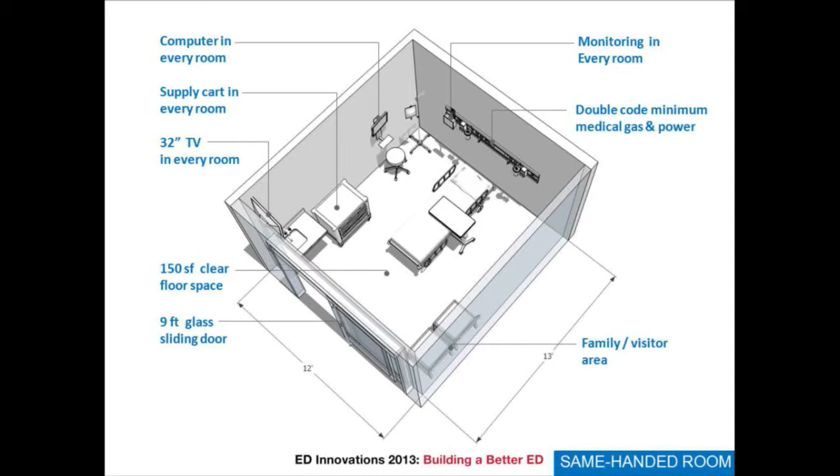Every room has a sink, a 32-inch flat screen TV, a supply cart per room, the document station in every one of the rooms, and then a family area.

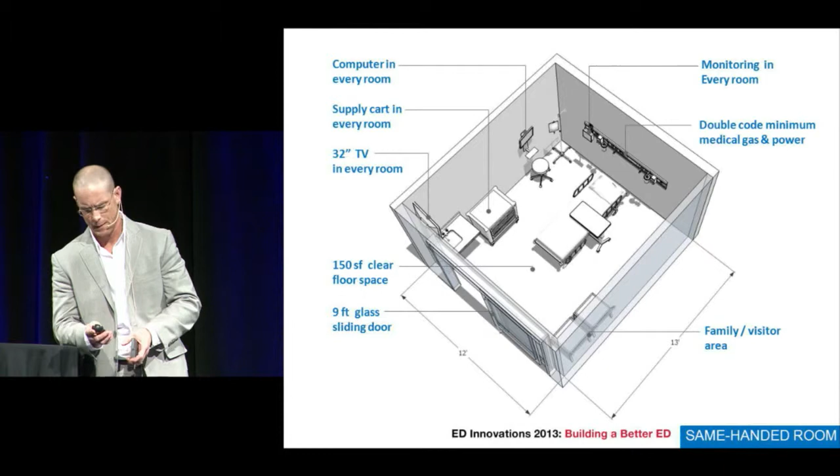We take that same concept of standardization along the room and incorporate it into a pod that is standardized. Each one of these pods is made up, in this particular case, of 12 rooms - the initial intent was a 12-room pod. They're arranged identically, with support space at each one of the corners.

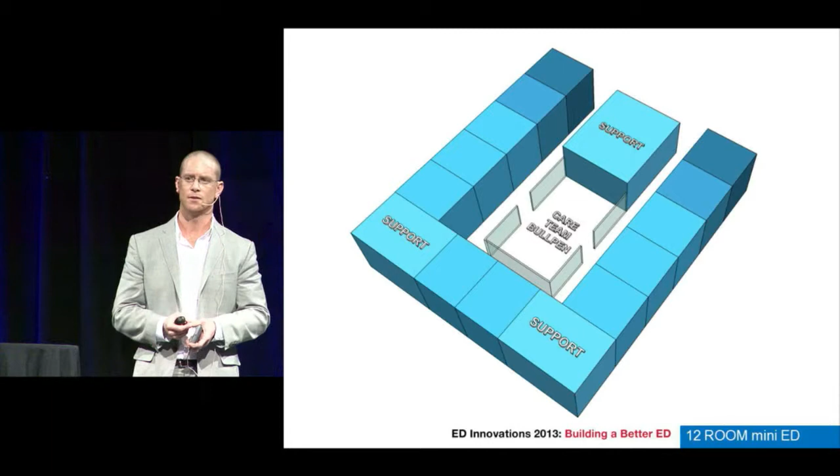So your clean linen, soiled utility, nourishment - all of those areas are decentralized within each individual pod. The pod itself then becomes a self-sustained mini emergency department. And then the number of pods is relative to the volume and acuity that the facility sees.

The core of the pod is what we call our bullpen, which Sherry alluded to earlier - this is our team care area. In this particular configuration, we assumed we would have a patient care team made up of 1 doctor, 3 nurses, a tech, and a unit secretary.

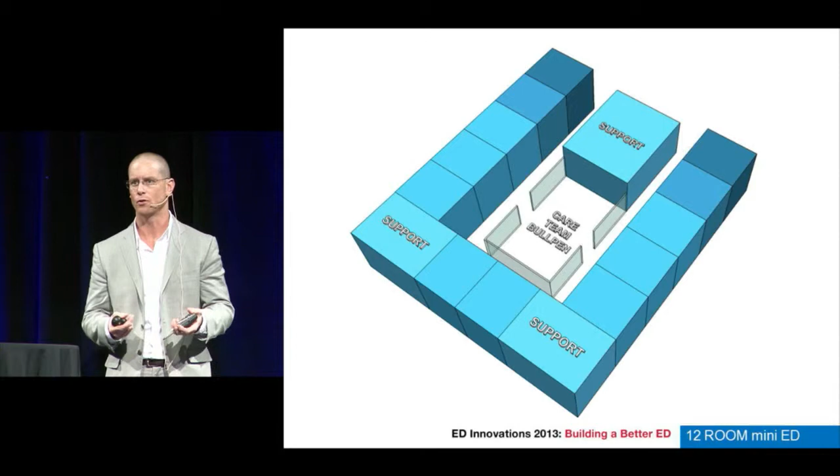The ability to flex in and out with mid-levels is there as well, because the number of rooms is based on the physician and mid-level component and what they can treat and see.

When you take those individual pods, we arrange them along a central spine. So the pods themselves are flipped about a central corridor, which in turn turns them into racetracks. When you talk about a breathing emergency department, this is one of the physical manifestations of that.

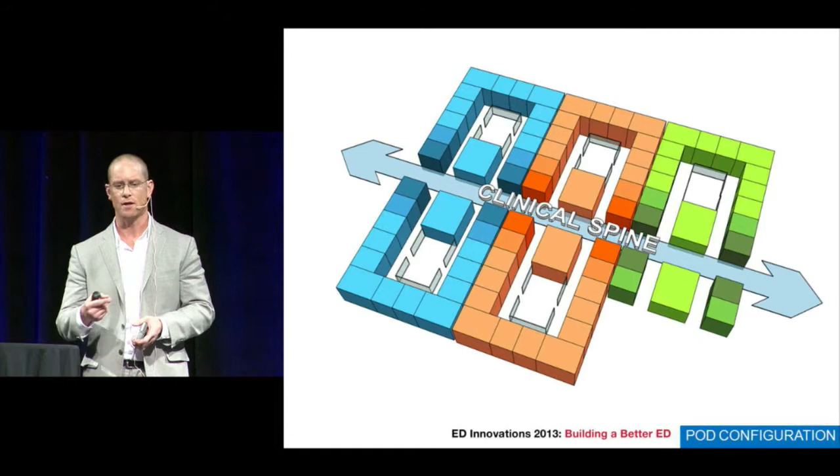During the day when you're the busiest, you have all 5 pods up and operating. As your volumes start to decrease later in the night, you turn them down, and right now I think they're running 2 pods 24 hours a day. So they have the flexibility to operate these pods based on census and patient arrival.

Another unique feature about this emergency department is each one of these pods operates as its own independent emergency department, but linked by this central spine, and has clerestory elements within the pod area. We elevated the ceilings up to 17 feet, with glass clerestories wrapped all around, so there's natural daylight into not only every staff space, but every care space.

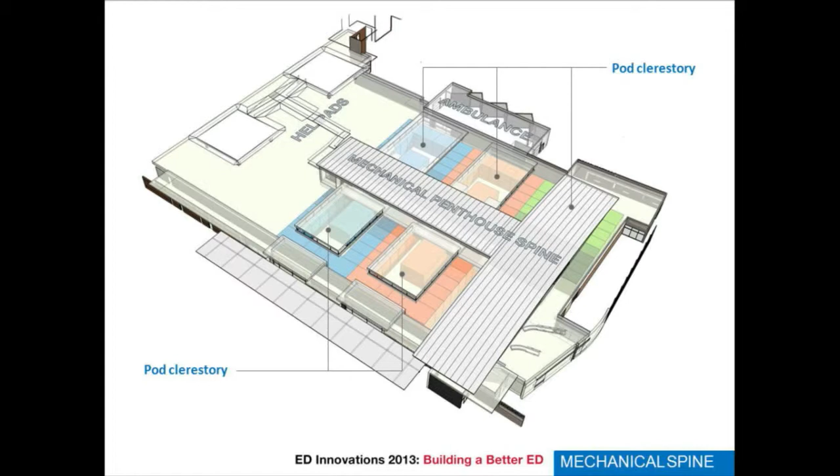Another thing we did was take all of the non-clinical components out of the facility - IT closets, electrical closets, anything not core to patient care - and put them up on the roof in a self-contained spine, which we call the mechanical spine.

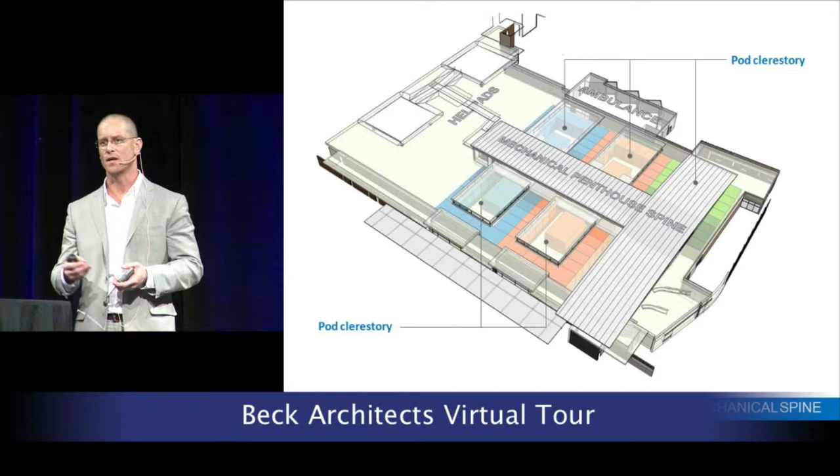What it does is it maximizes the efficiency of the space, so you've got only core space necessary for patient treatment on the ground floor. It also separates that maintenance traffic, so you don't have maintenance people coming in and working in the patient care area.

Now all of it put together—one of the unique things is packing everything under one roof. We relocated the entire emergency department from the north side of the existing hospital to the south. When we did that, we brought in imaging and everything else we wanted.

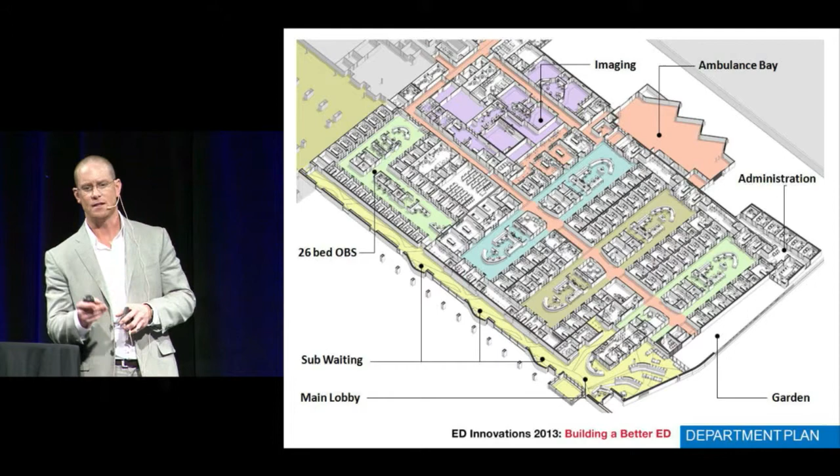Within the emergency department itself, it has an embedded imaging center. It has a 26 fully private bed OBS unit, and it also has the main administrative component for the ED, so trauma and ED offices are right off of one of the pods.

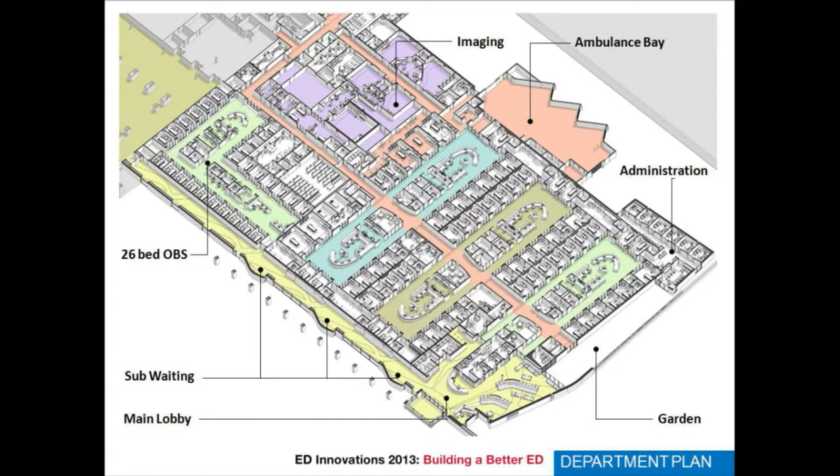The waiting room, when you first come in, is completely open, with visibility to the triage rooms. One unique feature is they went with 3 triage rooms in this model, placed right outside the waiting room, with sliding glass 4-foot wide doors that have supergraphics—1, 2, and 3—to designate the rooms.

They also have a 3M perforated coating that allows nurses in the triage room to see out into the waiting room and monitor it, but no one can see into the triage room. You can't tell it's there—it's not like mirrored glass, or the blinds that always give you trouble.

The other nice thing adjacent to the waiting room is a healing garden that patients, family members, and people waiting actually have access to while they're there. They can go outside, but it's completely enclosed—it's not like they can wander off, or people can come in from a different area.

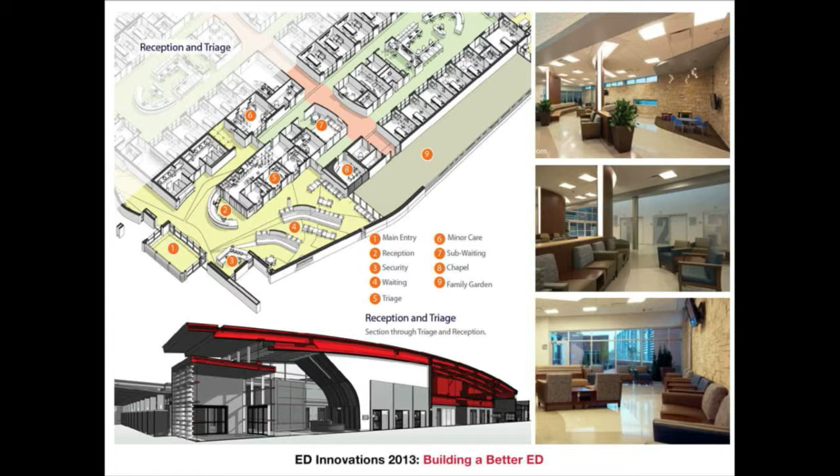In this particular area, one thing we really liked was wanting a minor care area where we could street and treat—take care of the 4s and 5s and keep them vertical. The initial design had 4 recliners just off the triage area.

Across from that, there was a sub-waiting or results waiting area. As things happened through design, we ended up losing 2 of the recliners for a discharge consult area. One of the things I think is very beneficial is the lessons learned going through some of these things, and I want to point this out while I get the chance.

That discharge consulting area, just like in every one of the projects we've done, is probably being used as storage right now. They would have been a lot better off having those other 2 recliners up there, and in the future, it'll probably revert back to that.

If anybody tries to talk you into doing a dedicated discharge consulting area so you can capture that patient as they're trying to make their way out, try to convince them that you can do recliners instead and actually affect the patient flow much better.

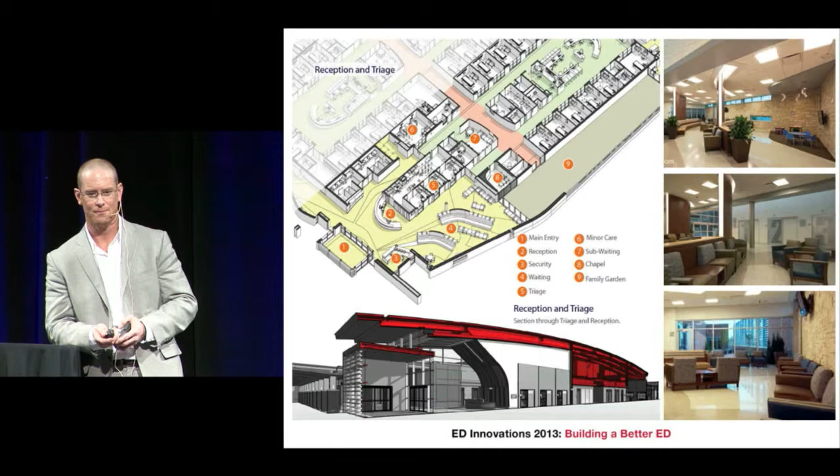This is the waiting room when you walk in. You walk in through a main vestibule, and 30 feet in front of that there is a greeter who takes your information. Directly adjacent to that is the security station that has complete oversight of both the waiting room and the greeting area and the vestibule and the drop-off.

If you were able to look at it from behind, you could see everything coming into the emergency department. Just like earlier, having a doc in triage up here would let them walk out and assess patients before they even came in the door.

One of the unique features is that we decentralized as much of the support space as we could along this main spine, so we have two different sub-waiting areas back into the emergency department itself. This is for family members who don't have to go back into the main waiting area, or it's used as a results waiting area for patients, but they're decentralized so each one services the racetracks along that main spine.

Another unique component is we actually put in a chapel dedicated to the emergency department only, sitting off of one of the first pods. It's an area of respite for family, looks out into the healing garden, and gets utilized more than we originally thought it would.

And then of course you see the recliners in the minor care area, what we call a fast track, for taking care of the 5s and 4s.

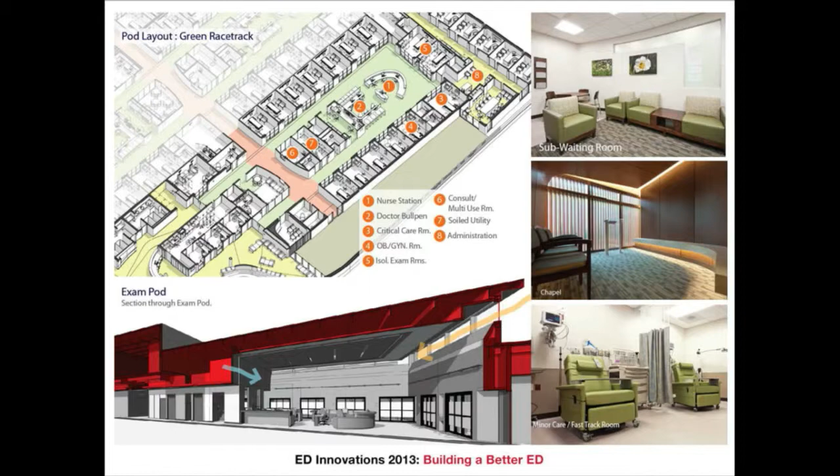This is what each of the pods look like. Once again, every one of them is identical except for the color coding. You see the bullpen, or the care team area, in there, and we wanted to keep it as collaborative an environment as possible, while still protecting the doctors from interruption as much as possible, giving the nurses the opportunity to be on the front line.

The nurse station has no glass, no visual protection, while the physician component is on the back side, acoustically separated by glass, but they can still visually access the rooms and patients. What we did do afterward is frost a band of glass so that when they're sitting and working, they have the choice whether or not to make eye contact with patients or families, just by looking up over the glass, versus everybody approaching them because they don't have the option to hide behind it.

Just behind that is the nourishment station, which we also combined with the meds. We don't have doors on it on either side, so you can access it, and that has all your nourishment, your fridge, your Pyxis, your supply cabinets, everything for that main pod.

You can see up there, 7, 9, and 6 are basically the core support areas. We focused those around the central area, and they support the pods independently. One of the things we changed mid-design was the original plan to have the spine separating a 12-room pod and a 12-room pod.

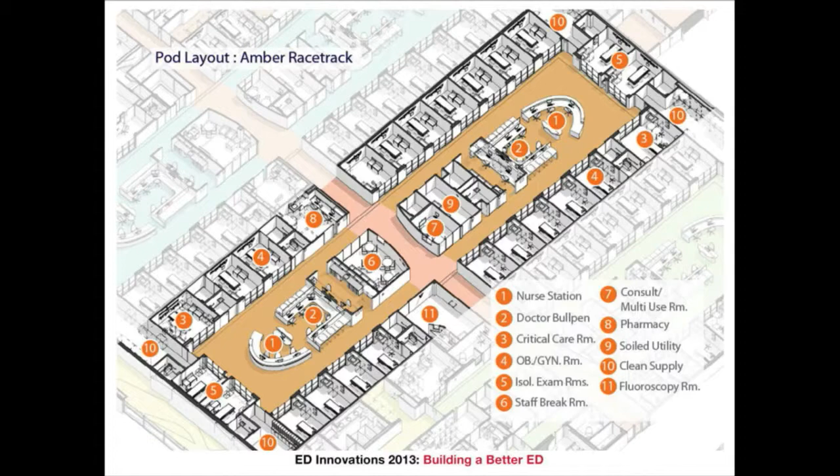This is the amber pod. The three pods had to be color coded with a name, so amber, blue, and green were the three different pods that they came up with.

Back to one of the comments that Sherry was talking about regarding the zones, they utilize the green pod, for instance, because of its close proximity to walk-in and minor care, as a fast track to throw your level 3s in most of the time. The trauma pod is its own trauma pod, and everything else falls in between. Depending on volume and time of day, they can mix and match since they're universal rooms for the most part, or designate a particular pod for a particular acuity.

This room is one of the things we changed up as well. In order to make each one of the pods its own independent emergency department, we incorporated a single room we called the critical care room in the corner of each one. That was basically a room not quite the size of a trauma room, but almost double the size of a regular exam room. We equipped it so it could almost be a trauma room. We don't deal with traumas there, but you take care of resuscitations, intubations, and some things that need a little more space. Each of the individual pods has one of those rooms.

Another thing we dealt with is we were able to stack interstitial toilets so that you don't really notice where they are, but on a flat ratio you have a 1-to-4 ratio, one toilet for every 4 exam rooms, which you don't see a lot of. I know in most of your emergency departments you'd like a lot more toilets. These have up to 4 rooms, depending on the pod configuration, with private toilets attached, and then another 2 rooms shared by the remaining rooms in that pod.

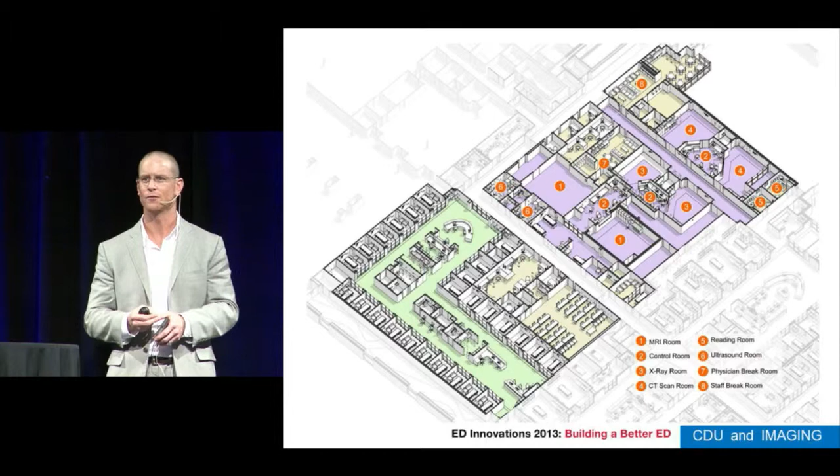And then there's just nice, clean, big imaging rooms.

Another substantial feature of this is a 26-bed, all-private room CDU that, once again, is as close to the emergency department as you can get. We wrestled initially with this. They have some substantial bedding issues upstream, and their capacity issues, so this is kind of a governor for it.

Plus, it was a great opportunity to introduce something like this. In hindsight, if we could, we'd probably reduce the number down to something more manageable, about 20. Manageable in the sense that we packed as many as we could in the space that we had, and as many toilets to take care of that, and the ratio really needs to be increased. I think it's a 1-to-4 ratio in here, but that's the number one complaint we get - there's not enough toilets for the number of private beds. In hindsight, we probably would have added more toilets and sacrificed rooms.

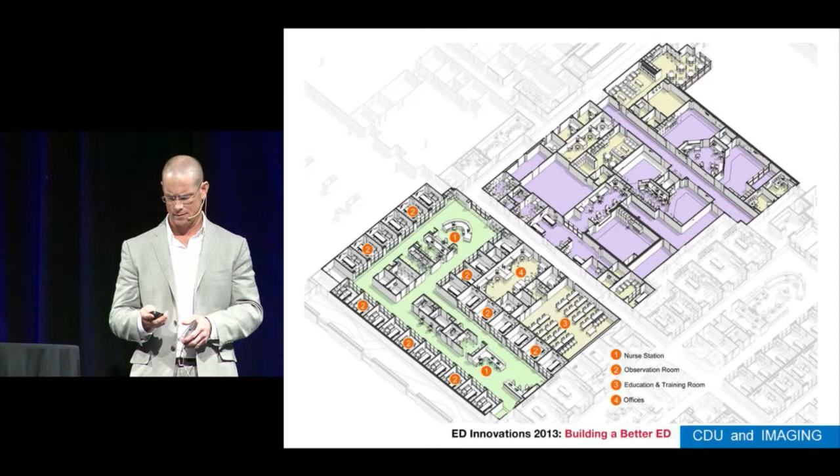Another unique component is what we call our education space or command center. Dead in the center, there's a room that is mainly an education space for most of the time, but it's tied in the AV system to fire, rescue, police, everything - a mass disaster command center type deal.

And they actually got to use it. I think they weren't even open a year when the tornado in Joplin, Missouri took out the hospital and did all the damage there. They received quite a bit of the wounded from that event. So they got to see it in action and watch it pay dividends.

This is an interior shot of the OBS unit, similar to what we did on the main ED, just a smaller version. Each one of the rooms is private, with sliding glass doors, has all the amenities for the family, as much space as possible, and the views and circulation and everything are set up quite nicely.

They have a lot of helicopter traffic, more than I've seen at any other organization. We put 2 helipads on top of the emergency department and fed them to an elevator that drops directly down into the trauma pod. They have another 2 existing helipads about 400 yards away that they use for service pads. Same with the ground traffic - they have a lot of ambulance providers out there aside from their own ambulance service, so they see a lot of ambulance traffic.

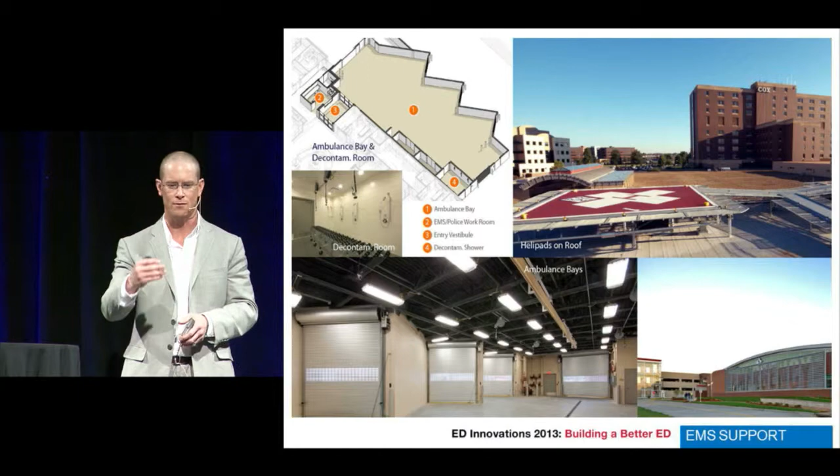From a design standpoint, the emergency department is the front door in every way these days. We put this emergency department on the south side of the hospital, which is where most of the people come from a traffic standpoint. So visibility was key—off of the main highway, you can see the emergency department.

We took the opportunity to incorporate a garden that was accessible both from the emergency department and from the waiting room, giving patients and families a place where they could go outside if they wanted to. But as part of that, we needed to screen it off, fence it in, and also protect it from the sun.

So what we did was build a 14-foot high, 120-foot long stainless steel fence, and then we CNC'd in 12-foot letters that say emergency. So literally the signage for the emergency department is on the facade of the building, which is pretty unique. At night, you can see it from half a mile away, along with the clerestory and the lighting, designating exactly what it is and where to go—no confusion at all when you approach the campus as to where the emergency department is.

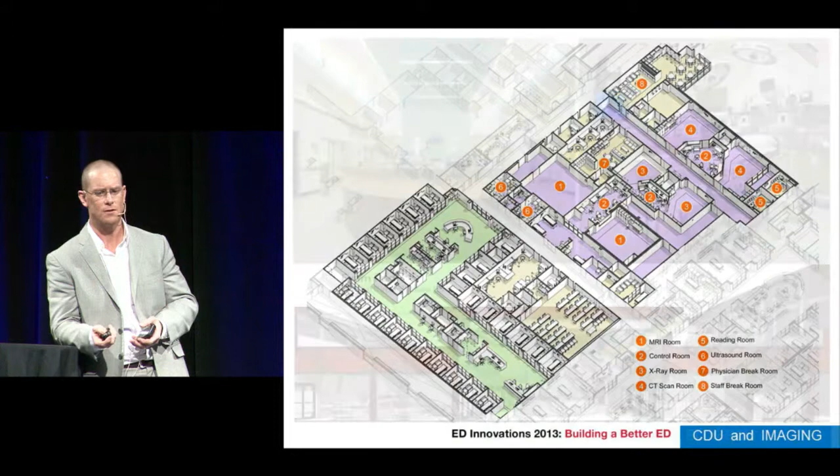Everything is patient-centric from that standpoint. We do have the main radiology department there, but they also have several portables. In each one of the pods, you have corners that are support space, and each one of those support spaces houses a portable X-ray machine. So that mini emergency department pod has access to both ultrasound and X-ray, where you can go in and out of that pod instead of having to take them all the way back to radiology.

Part of my question is whether most ordinary X-rays are being done in the X-ray department, or are they being done chairside—things like ankles, knees, shoulders—or are they still traveling to the X-ray department? The question was how many ankles and things are being done in the room versus going back to the main emergency or main imaging department—portables versus going to a room.

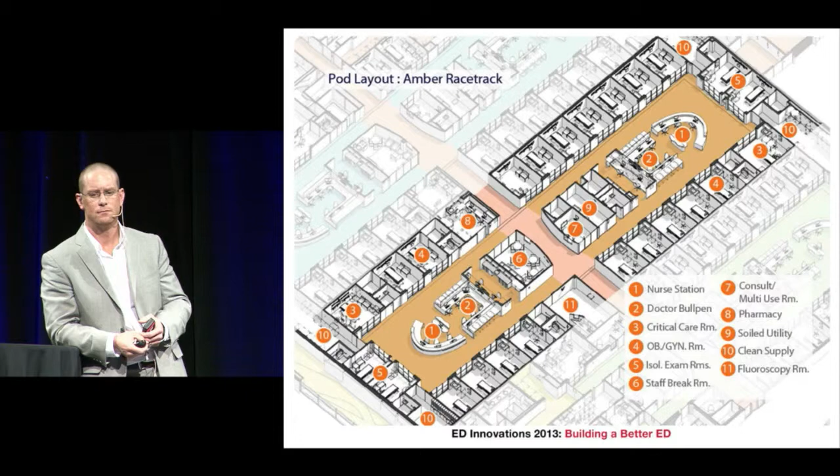One thing Sean left out, and I know he covered a lot in a short time: in the amber pod on the west side, basically dead center of all 5 pods, he put a radiology room for plain films with fluoro, and we use that for all the little stuff that comes in. We did that so that if we're getting backlogged like we all do, we can get those X-rays rolling even while they're in the wait time, waiting to get back to a room, and have results before they get seen and make a disposition.

In the main radiology suite there are 2 more rad rooms, and due to our radiologists' preferences, they take probably 90% to the radiology rooms and the rest they'll do portable. Chest we'll do portable all day long, but most of the radiologists don't like the quality of the film from a digital portable. What we like about digital is, especially in the trauma bays, we put PACS in all those rooms, and they'll shoot the digital and in 60 seconds we have it on PACS—fired right there, and that took us from the dark ages.

One thing—I don't know how many of you guys have overhead X-ray in your trauma bays. We had that, but the bang for the buck is really not there. It just sat there all the time, and we'd get good quality images, but it's a waste of money, especially with digital portable machines and the quality that they produce now.

How much was the total cost, and from breaking ground to opening the doors, how long did it take to build? Total cost on the project—well, let's put it in perspective, now you got the contractor talking. This total project is 87,000 square feet.

What you don't see is that it also included a tunnel component that tied into service, laundry, everything, because we separated that traffic as well—you're not going to see anything from dietary coming up. It has its own dedicated elevator so it doesn't cross. We did the same thing for patient traffic and transports back to the bed tower—there's an elevator and a rooftop connector dedicated just for patient traffic, so they don't have to cross through public areas. Taking all of that into consideration, the total construction cost was $32 million.

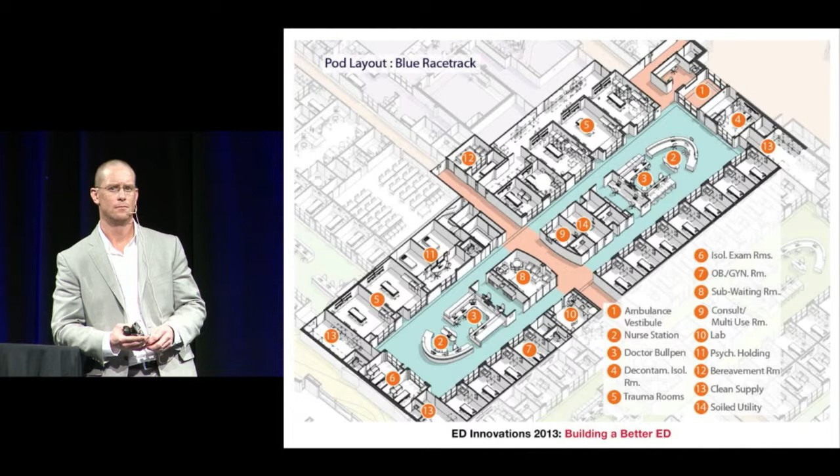Due to the process changes, it doesn't matter how much planning and preparing we did, about a third of the nurses said, to hell with it, I'm out of here. So we then spent a year and a half getting back up to staff, and we accomplished that last August.

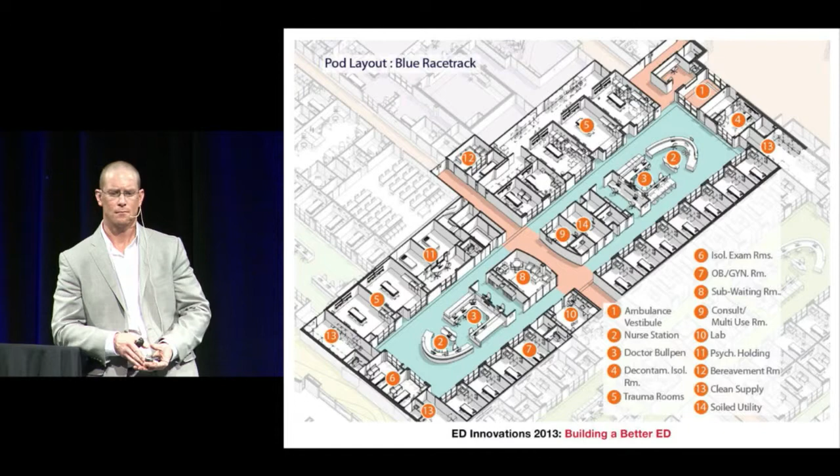And since that time, we've also made a couple additions. We've really finally perfected matching our staffing and nursing staffing and physician staffing patterns with our arrival times. So our door-to-doc time, the first year was 97 minutes, and we're down to under 35 consistently.

With that, we've seen our LWBS cut. Jim commented on it in an email last week that our LWBS went from 5.5% to we're running right at 1.5 consistently now. And our customer service scores go right up with that, because they go hand in hand. Nobody pays to wait.

Just one last thing on the patient flow that Sherry talked about earlier. It was funny, they were asking about the patient flow - what's that, we called it. They came up with this when we were doing this: we have a comms nurse centralized right there in the green pod, and she is responsible for placing every single patient, no matter how they come in - ambulance, transfer, whatever it is. That really adds to the efficiencies of the facility, being able to know where and how and when at all times.

I'm just going to add, from doing lots of construction projects, it's a rare leader that can lead through a redesign project and survive into the new ED. So you've got to write down a lot of the stuff you were doing and thinking of. Second, if you leap over one of those 20,000 volume increments, you really change your process altogether, and you do lose a lot of staff.

And it's best to implement your IT changes before you move into the new emergency department. Oh yeah, we did that - one success factor, about 8 months prior to going in. We went from paper to electronic, so I had a double whammy for staff satisfaction.

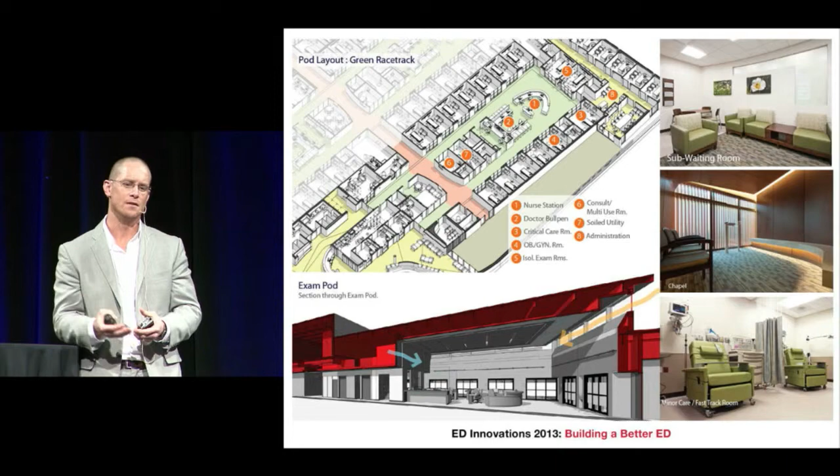Just wondering how your soundproofing and noise level - great question, once again I forget, repeat the question please. The question was soundproofing, noise level.

So just like with many of the things we heard today, we have white noise, or actually pink noise, throughout the entire thing. It knocks down probably 30% of everything you would have, masks it. In addition, like was referenced earlier, they're called NRC panels - instead of typical acoustical ceiling tiles, they have a foil backing of fiberglass, and they increase sound absorption as well.

And the masking systems, that's a no-brainer - you guys should do that no matter what facility you're in, new or old. It's a really cost-effective way - get in there, you can implement that tomorrow.

And doors on every room instead of curtains - that's true, absolutely. And the sliding glass doors, I think that's... we haven't done an emergency department in the last 7 years that didn't have sliding glass doors. We just take it for granted, because I see other projects that just have 4-0 doors, and you don't realize what a difference it makes.

Operationally, this tells it all - you guys all deal with the almighty grievances, right?

We waste a bunch of our time on this stuff. Our complaints were always, well, I overheard people, whatever. In this ED, our complaints are, well, I waited in the waiting room for an hour and you guys aren't even busy, when every room is full. The place looks dead and it's quiet. It's really low key, pretty amazing.

Any of you guys are welcome to come see it. God knows I give enough tours, thanks to him, there's too much. Any music or television or anything in there? Every room has a TV.

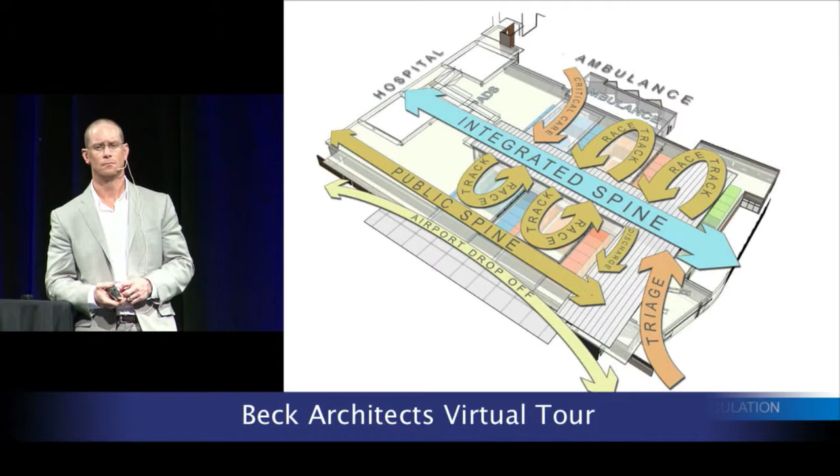Another thing we use to help offset variations in the acuity of each pod is that amber east one - it's one that stays open 24/7, the 15-bed one in the middle. There's a second doc in that one that takes 6 rooms there and 3 in the green, typically. That person also floats to any other pod that needs help. If there's just a patient that they're too overwhelmed with, they can go over there and help them out.

Sorry, I'll just repeat it - the concept of load leveling, you should be thinking about as you expand into different geographic zones or pods. That's also why initially, Sean is correct, the green pod was going to be kind of the fast track stuff. We decided real quick that is not an equal load. So we use every pod, we try to spread the wealth, so you can have everything from death and dying to sprained ankles in any pod.

Which you have the capacity to handle. I was going to ask, who staffs your OBS - is it mid-levels? Hospitalists. Yes. The original concept was that the ED would take care of it, but once everybody started looking at how do we get compensated physician-wise, who controls it, how do I take care of that guy that's that far away - that's not fair - it all defaulted back to the hospitalist. And they love it, to be quite honest. They leave hospitalists there 24/7. Oh yeah, hospitalists are good. It's just the whole hospital uses that thing too.

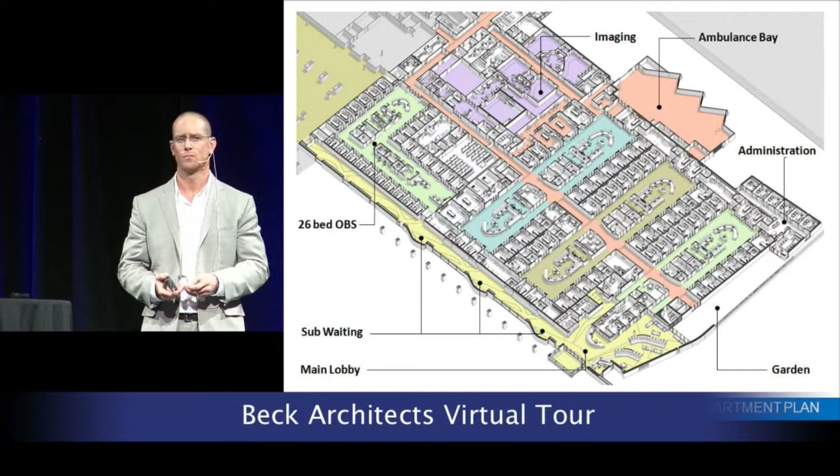So, yep. Thank you, yep, both, FPs. Sean? Thank you very much.